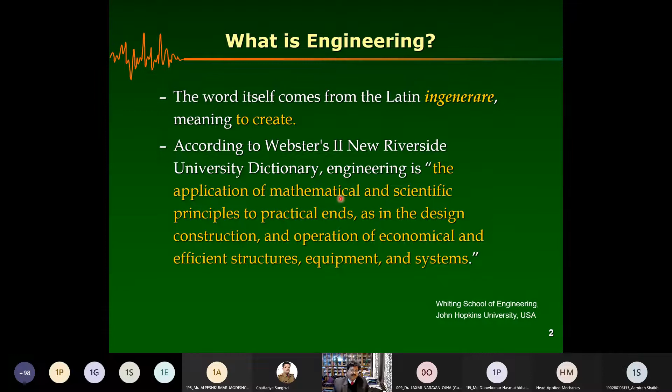But if you see what engineers do, it's a little different than the literal meaning of engineering. It's about art and communication, politics and finance, modeling and simulation, invention, approximation and measurement, and estimation, and more. So from today's discussion, the tasks that are important for us are modeling and simulation, and approximations, because very rarely do we know the entire physics of the natural phenomena or the behavior of structures subjected to these environmental loads. And then the measurement. These are the three tasks that we often deal with in developing new theory or testing new design.

So engineering, as I said, is a way to think about problems and seek solutions. You need to define the problem and then try to seek the solution. Now, coming back to earthquake engineering, if you see what causes earthquakes, that is quite complex. Today we understand that most earthquakes are due to the rupture of tectonic plates.

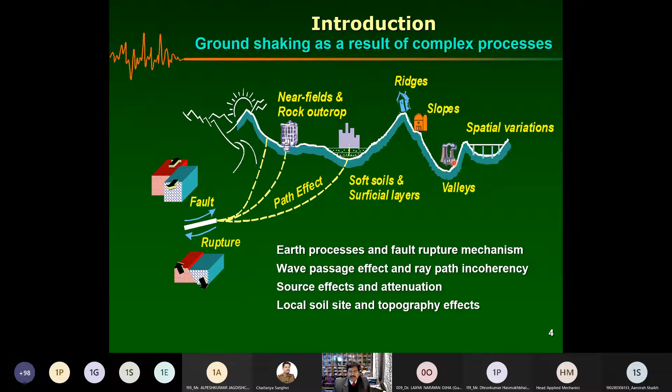And what we know about hazard is that if you're located in certain regions, the code may give you a maximum PGA for which the structure has to be designed, associated with the response spectrum. So these are the two quantities that you need to fix your forces.

So currently we have been having this so-called deterministic or judgmental based zoning map. Now we are also working on getting some probability based hazard maps, and something like a return period of 2,500 years, so you can get, and people have worked also in the past to get a more accurate PGA using different methodology, different inputs. So with time, of course, if we know more and more, these maps actually get updated.

And in some places where you have more data, like in California, you can be more precise, telling what is the probability of an event occurring in the next 20, 30 years, which has a certain probability of exceedance. So the point is again that there are a lot of uncertainties. Even if I choose a PGA, no matter where, there is a certain amount of uncertainty associated with it.

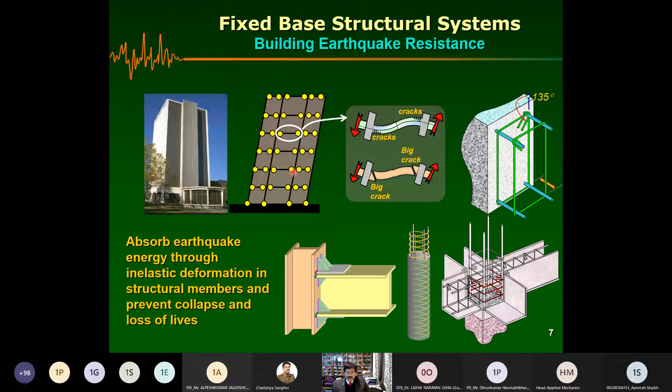So the maximum drift that we put is something about 2%, so that the structure should remain stable, not deflected so much that under the P-delta effect it becomes unstable and collapses. So we need several criteria in the design, and then we wait for the earthquake to prove whether it's right, or we have to do certain experiments.

So the other option is, if you don't like that drift, or we believe primary members should not get damaged, we want our structure still functioning. Then we can have alternative methods, such as various levels of dampers—friction yielding or yielding dampers, viscous dampers—to dissipate that energy and keep the primary structure elastic or near elastic for most earthquakes. For extreme earthquakes, of course, you may have certain damage to plastic, so there's another alternative way of design.

As I said, for further superior performance, you can also have base isolation, which provides a kind of barrier so that the energy does not move to the top. So this is a fixed base, but if I put flexible pads, then I can make this deform and provide a barrier so that the energy does not flow above. So very small movement, better performance—something like what we had in Bhuj Hospital.

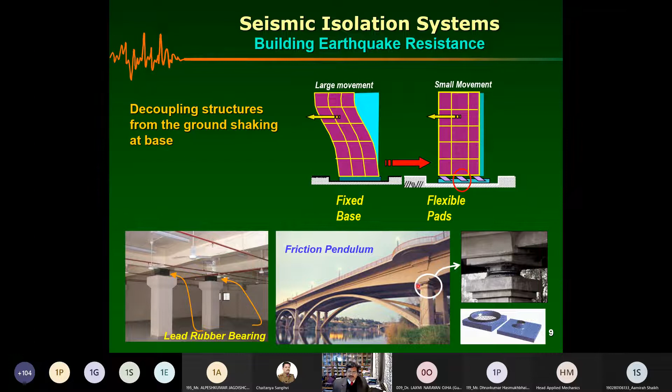Bridges are also being base isolated, on the premise that you are providing a level beyond which this energy from the ground is not transmitted. Then one step further: let's say if I do not know about how the future earthquake would be, can I measure this earthquake and then change the property of my structure in real time so that it can resist the earthquake better?

That brings us to active control strategy. The meaning is that I have sensors that pick up the impending ground motion and calculate what the response would be, and I can have braces which are active, meaning I can make them tight or relaxed, so I can change their stiffness. I can have some mass at the top—if the structure wants to move towards the left, I can move this mass towards the right in real time and create an opposite force to control the deflection.

There can be many strategies, and of course associated problems, because how much power would be needed and whether that power would be available during the earthquake. Remember, earthquake civil engineering structures are massive—you need a very large amount of power to make any changes. Unlike other structures where active control is used widely, such as airplanes and vehicles, which have much smaller mass, much smaller forces are needed to control them.

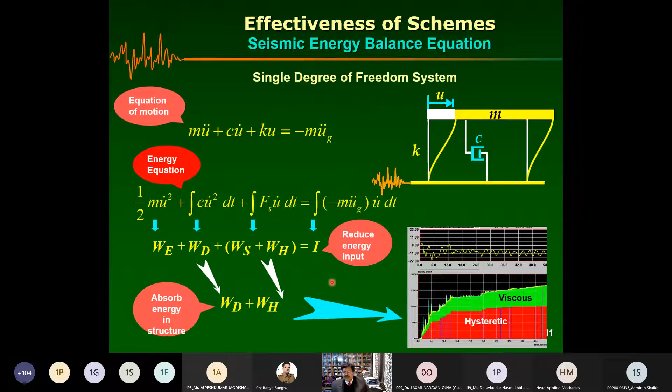And then you see where very little one is your strain energy. So we need to build this energy dissipation potential. Now, how do we test it? Let's say I have built this energy dissipation and then I need to verify it before I

apply into the real life structures. So one way is that we can build the structure, put it on a shake table and apply the ground motion and see its response. But as you can see, the civil engineering structures are massive. Even moving them, building them in laboratory and moving them requires tremendous amount of power.

So what could be an equivalent? If you see this equation here, this is similar to as if the ground motion is applied at the mass. So we can hold this structure at the ground, and instead of applying the force at the base, we can apply equivalent force at the mass. And we will still have the same equations. So if this UG double dot varies in real time, we are simulating the same effect as this one. So this is a moving base, and this is an equivalent force applied at the mass m.

Okay, so that's your approach, and that leads to several sets of tests that we perform to understand the dynamics as well as the seismic response of structure. So as I said, you can perform tests in field, you can perform the experiments in laboratory.

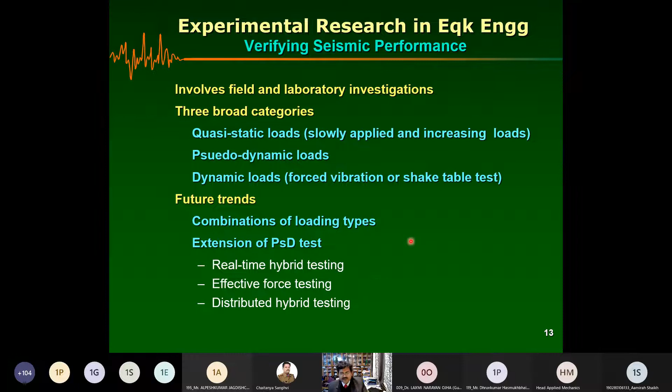Sometimes we combine pseudodynamic with the shake loads in various ways. And because of the equipment, actuators and other things that are getting available, we can have various kinds like real-time hybrid testing, effective force testing, distributed hybrid testing. I mean, these are some variations of pseudodynamic tests, and we will briefly talk about those towards the end.

So one important property is knowing the dynamic characteristic of the system, which is basically your natural frequency of the system or natural period of the system and the damping levels.

You can have a simple electromagnetic shaker and then various kinds of accelerometers that you can use to apply a harmonic load. So that's a very simple way.

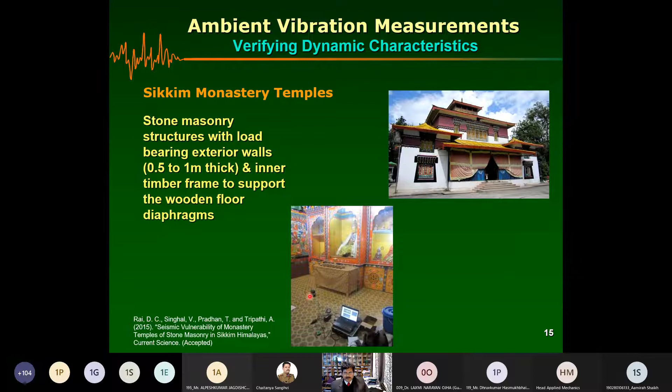Okay, so here you can take the sensors, and you can do measurements with the ambient vibrations, and you can see very clearly that they are short period, or the frequency is somewhere in that range, 3.3 hertz, 4 hertz, the short period. And clearly their acceleration control means their stiffness could be small, but they're so massive that it makes them short period, and they would respond to the acceleration rather than the displacements.

Take for example a half semi-dome gate made of Lakhori bricks and masonry - structures that are 100 to 200 years old, and you do not know what is there inside. You can make certain measurements about their properties and create a computer model, but the question is: does it represent the existing structure?

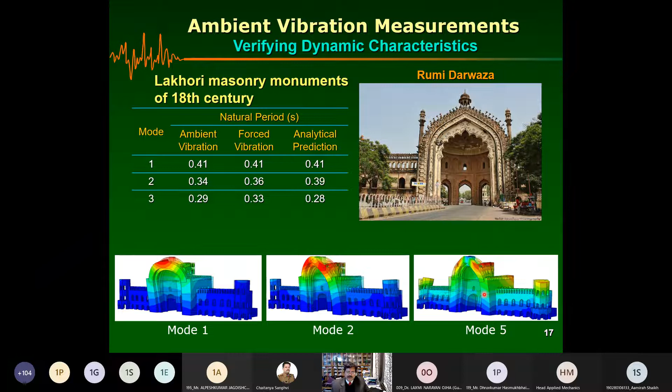You can carry out ambient vibrations, force vibration using mass shakers, and analytical predictions. If you have certain properties and geometry, you can train your model. This model can then be used for further analysis at various levels of earthquakes, and hopefully your results will be more in tune with what happens in reality.

You can go more sophisticated with more details. This is the fundamental mode shape - the structure, being a semi-dome, is unstable in these directions. This structure is about 27 meters tall. This is more likely the failure envelope, or the displacement, or the modes in which it is likely to fail.

The same approach can be used to train models for other structures. Here is a 3-story masonry infilled reinforced concrete frame building. We have an eccentric mass shaker, a larger electrodynamic mass shaker, ambient vibration, and analytical predictions - all in a pretty close range.

This shows that the presence of infills makes this structure, despite having a concrete frame, a very short period structure. The masonry infills actually make it an acceleration-controlled structure.

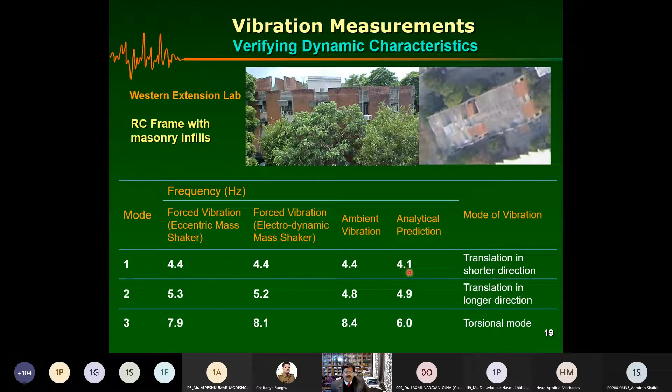Ambient means you start shaking from here, and this portion does not get excited - there's a large opening in between. So even the experiments have to be very carefully planned for structures with such a high level of irregularity. It's very difficult to predict the response of such structures, which is why in earthquake engineering we always emphasize keeping these structures simple.

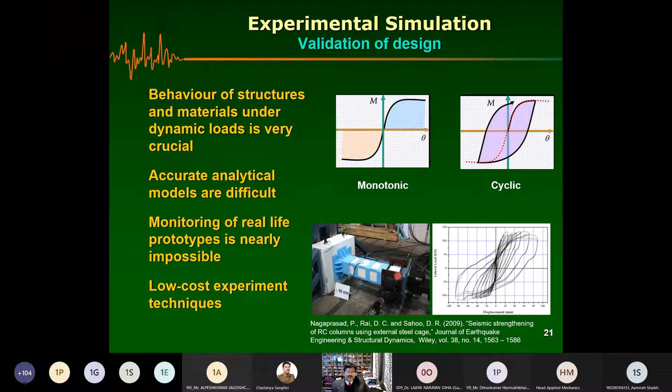So you can see an actuator here, which is applying compressive load, and this actuator here is applying the lateral load. And you're testing half column, assuming that there is a point of inflection at the mid height of the column, remember from the Portal method. So we just isolated an assemblage of the foundation and half of the column. And then we see that yes, it's indeed, you can take the load, hold the load for long, and it works, and it can convert a weak column into a strong and more energy dissipating column.

So let's say you have an idea that we have a steel frame, and this is with simple connections. So we need to provide braces for the lateral loads typically. Instead of braces buckling, whose energy dissipation is very poor, can I put some kind of a damper here? During the earthquake, this damper will actually yield in shear and dissipate the energy.

So what the damper could be is simply an I-beam. We can take aluminum, since aluminum has a low yield value, so I can use a thicker web because this web is under shear and all energy will be dissipated by the web. I can use a thicker web because then I can delay the buckling which occurs. So if this buckling is occurring beyond my design drift, then I'm okay, something like 20-30% shear strain. If I can delay the buckling by using the low yield of aluminum, then I have a good design.

So I need to test it. I go and say, well, everything remains elastic in this case, only this thing yields. So I just take out this part and subject it to sinusoidal load and observe its deflections, shear stress, shear strain, and I can see that it's fairly stable up to 20%.

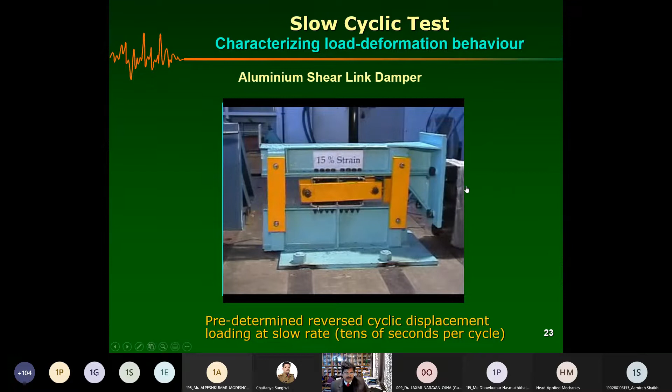So that may be my first step, and this is how I can perform the experiment. You can see that this is a simple experiment in which I'm applying a displacement, a predetermined cyclic load, and then put the sensors here to measure the shear strain and also the deflections from the actuator and the load. So I can get a hysteretic behavior of this.

Now, once you've done it, you can say, well, how this will work for a system. So you can have a column, beam, and this is my retrofitting scheme, that I have a deficient column. I can retrofit with steel jacketing, and then here I can put a damper for additional damping. And then I will put a steel beam which I connect. So this way it's totally a different system, not disturbing the existing beam or existing column. I need a proper frame where I can put everything, so I can apply just the lateral load from here.

So this is the kind of static cyclic test, this experiment. So we can go on increasing the drift and observing the performance. There are some vertical load simulations.

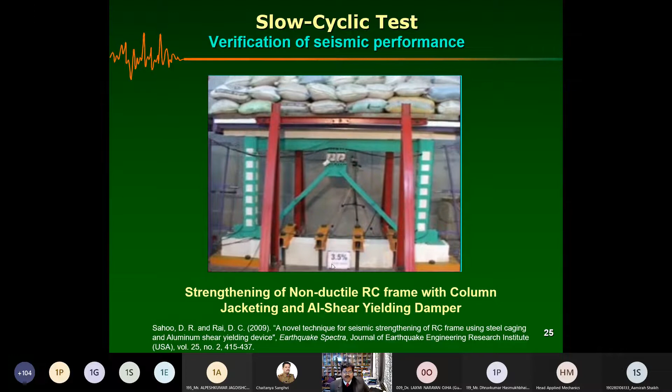So the idea is that all the deformation should take place only in this area, and all other members should remain elastic, especially the braces should remain elastic. We've gone up to 3.5%, and you can see the system performed quite well. So it builds us confidence in these systems.

And that was a half scale model, so the question would be, well, if it works on a half scale, can it work on a full scale? Here it is, 5 meters wide and 3 meters tall, full scale columns, you see. And then you have these dampers here, aluminum dampers, they're connected. And this is at the end of a test.

And then there are a lot of loading protocols mentioned, that if you're proposing a system, it must meet a performance under a specified standardized loading scheme, such as here. And this is the behavior that you can see, that you've gone up to about 20% shear strain for very healthy loops. Beyond that, of course, there was buckling of the web, and then the energy dissipation deteriorates. So 20% is kind of a limit for this.

And this is again a video, and it shows you one loading scheme. So we are looking at this from the front, and we're looking from the back side of this device. And here is the 1000 kilonewton actuator, which is pushing it left and right.

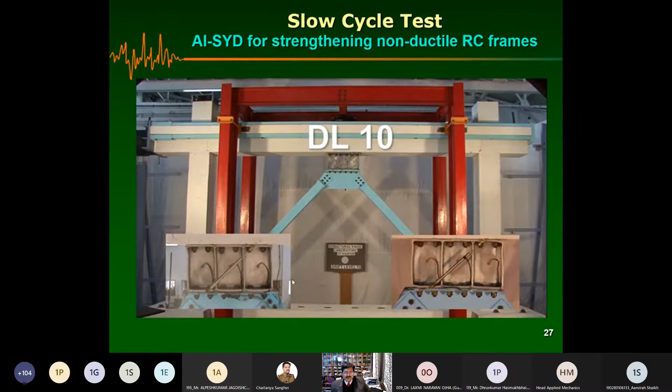And as you can see, the buckling did not take place at that stage. So similarly, we can carry out...

Let's say you develop a new device. In this case, we are developing a buckling restrained brace, and our design calls for an aluminum core. The advantage is that it will yield at low stress, so I can use a thicker plate and therefore delay the buckling and get a better behavior. So this is the design that we propose.

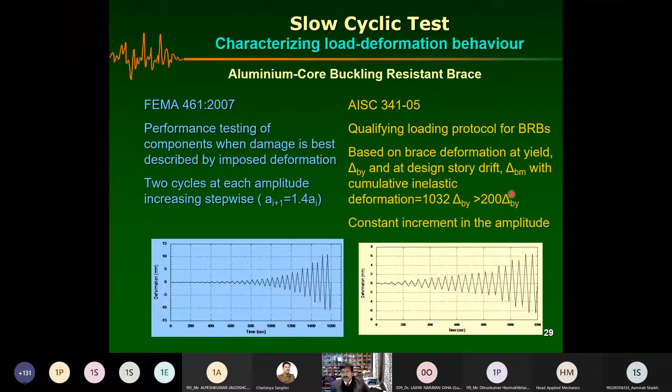Then, of course, there are various loading protocols that a device has to satisfy. This kind of loading has each successive cycle at 1.4 times the previous one, with 2 cycles of loading at each displacement level. But then the American Institute of Steel Construction has a different loading protocol—you can see they also dwell twice, but at different increments, because a different set of people have been involved in developing it.

So let's say this is the device that we developed and built. This is our casing, this is the aluminum core, and we are just applying the axial loads and seeing whether it meets the criteria set by these codes. So you can see that the aluminum thing is extending and yielding.

Now, what is the difference between these loading protocols? You can see that more or less they're talking about the same thing, and the behavior was quite good. We can go up to 6% axial strain without any buckling, and you can see some strain hardening because of post-buckling response. So the scheme actually does work.

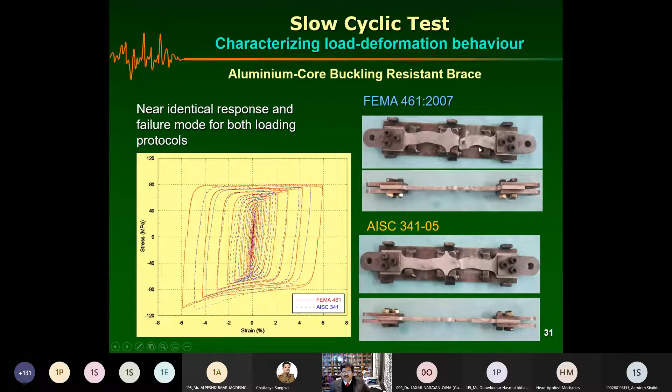Once we had done this, we thought, can we use steel in place of aluminum? So you can see this—it buckles, and then the steel is so strong that the casing which is there to prevent it buckling, that also buckles. So now you need a very heavy casing if you're using this steel core, whereas the aluminum is very nice.

You can see very stable behavior even up to very large deformations. With steel, though you get more strength, you do not get enough strain. So that shows you the comparison between two different materials, and some of these can be established only by experiments.

Now, let's say where do you want to use it? Let's say we want to use it in a truss moment frame, where there's a truss and a column, and here I'm using it as a knee brace, this link. We can test only this portion, because there is going to be a point of inflection here and a point of inflection here. So I can just take this portion and test it in the lab.

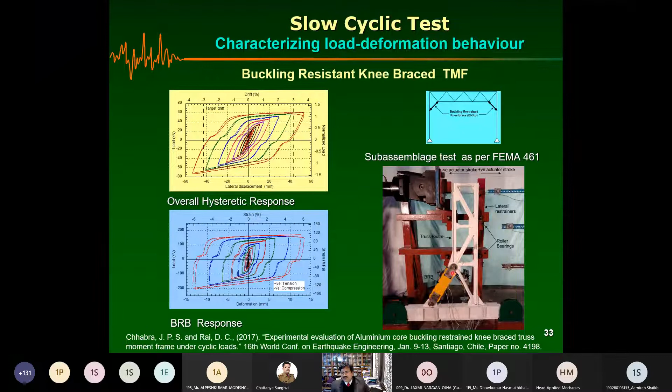So we create a sub-assemblage, create the proper displacement and force boundary conditions, and then we have to demonstrate that the entire truss and the columns remain elastic for the design forces or design drift, and only the braces buckle or yield. Once you've done that, of course, you need to perform experiments. This is another set of experiments.

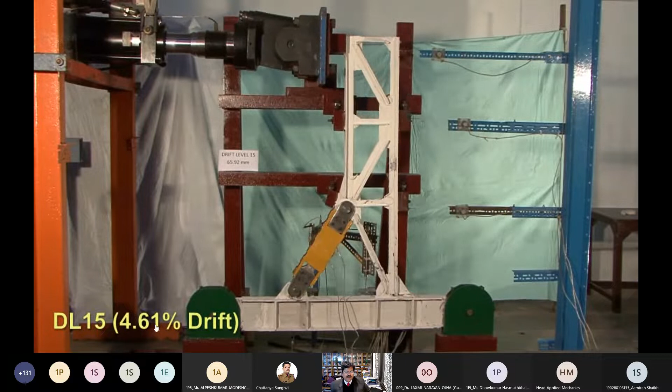At 2% drift, the system is more or less elastic. So these are the ways in which a new system that you develop can be verified, and experiment is the only way.

These days people are using AAC blocks as infill material. Now the question is, are AAC infills better than clay brick? What would be its impact if you have open ground story frame buildings—are AAC blocks better compared to clay brick? So you want to carry out this analytical or fragility analysis of these systems, but then you must know how the frame behaves with the AAC infills.

So again, if we can perform an experiment and find out what its hysteretic response would be, I can actually develop the fragility curves, and similarly I can develop them for the clay brick, and tell you at different loading levels what the differences would be, and which one is better.

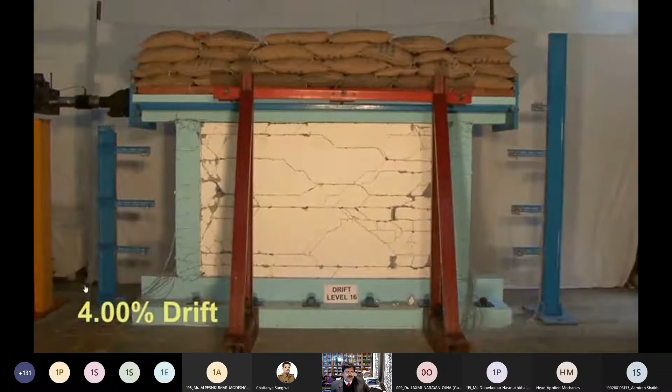So to generate this, you need to have a frame, place the walls, and then apply the sinusoidal lateral load to generate the force deformation relations. We need to go at least 2% drift because that's the minimum required, and since we're doing a sub-assemblage, you should do a little bit more than 2%. Now you could have seen how the behavior was, much better.

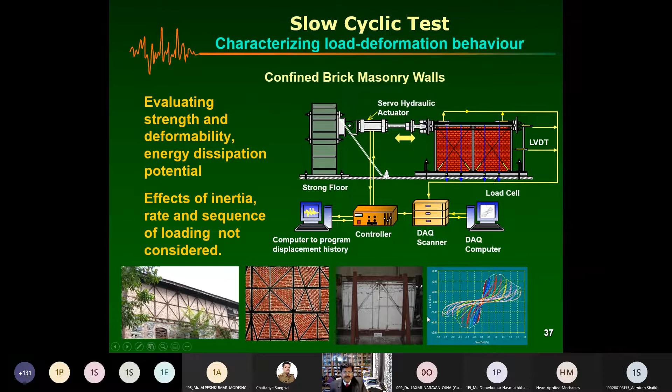Than the clay bricks, but visually it's okay. Similarly, for any systems, let's say you have the confined brick masonry system as people have been building in many earthquake prone regions such as Kashmir, etc., and you want to study the force deformation relations. That's why they do better. What is their nonlinear response?

Go to the elastic. We can build the specimen in the lab, subject it to gravity loads, and obtain the hysteretic response. As you can see here, this can go up to 1.5% drift and even maintain significant strength up to 2.5%. What this is doing is because of the timber in there, it subdivides this wall panel into smaller segments, and there is a preferred sliding plane along which this masonry moves and dissipates energy and imparts flexibility.

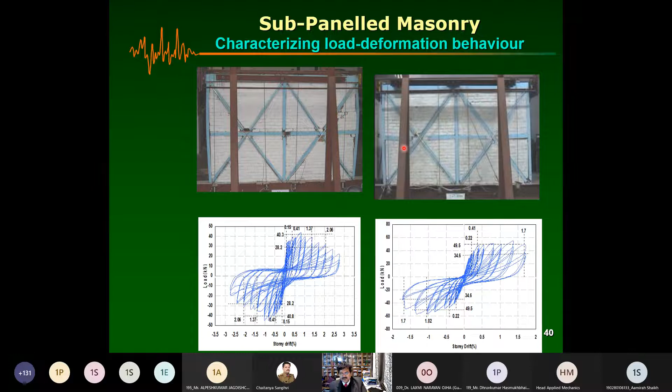So from choosing the arrangement, you can see what is good for you. Now we have performed the experiments, you can model in ABAQUS to get better insight. Once you have that, you can develop some design equations. Like here, what we've done is the confinement parameters, how many more interior members you have compared to what we need just to confine from outside.

And if you have just horizontal and vertical, the strength increases much less. But if you put the diagonals, the strength goes up. So you have some data from the experiment, and others you can do with finite elements. Similarly, you can do with the stiffness - the horizontals don't add much stiffness, but verticals add more stiffness. So these give you some idea about how, if you want to design this confinement, how many extra elements are needed.

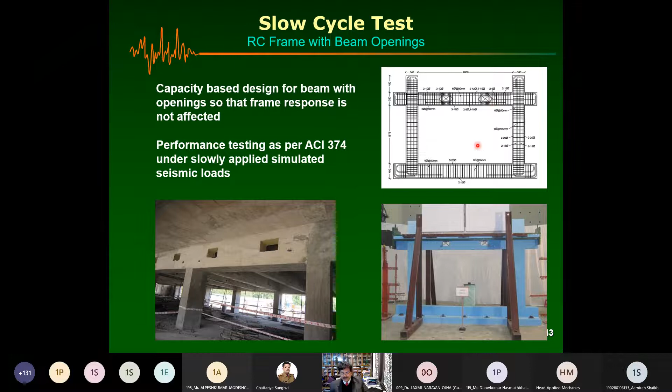So this is the half-scale specimen constructed in the lab. Again, we have to test it according to the ACI 374 loading protocol, going all the way up to 2% drift to see whether the system is doing well.

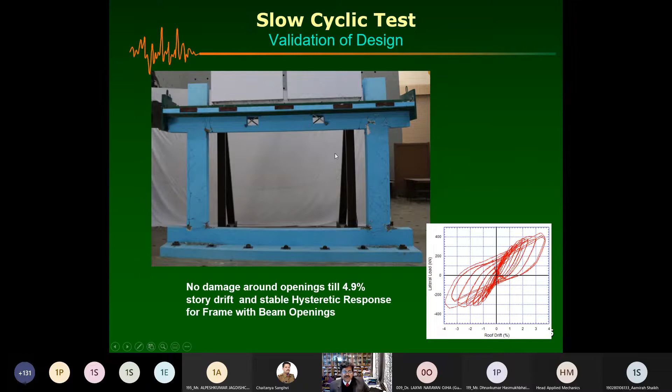This is at the end of the test. You can see that this opening design was perfect, and you have the plastic hinging at the end of the beam. Since this is only one column, there are some damages here, but this is very large - 4.9% drift - and you can see fairly stable behavior. So if you have very small openings, located significantly away from the column ends, with sufficient reinforcement at the chords, at the bottom and top chords of the opening, then you can have these openings even in frames resisting earthquake.

So that's pretty much the static test that I talked about in several applications. Now, the equation of motion was like this, so we are only concerned about getting this load displacement response. Now, how about the two other components, the inertia and damping, and then the real earthquake?

So what I can do is create a mathematical model in the computer and solve this equation, and find out what the displacement should be, and that I feed to my actuator and then displace this structure, measure the forces, and then modify this K again, and solve for the next step. So in this case, I would be calculating the inertia forces and damping forces in the computer. Their effect is calculated analytically, and the new displacement is calculated and applied to the structure, then next step. So step by step we are simulating. We're not doing real time. As the earthquake, let's say, is 20 seconds, we may take 2 hours to do this test, but in a way we will be compensating for the effect of damping and inertia, and that is called pseudo-dynamic testing.

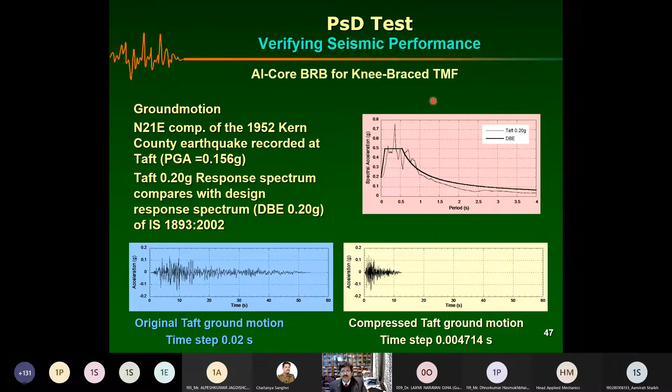So here is, let's say, this same knee brace TMF I had, and I want to verify it for the Taft ground motion. Since we are doing scaled testing, we need to reduce it, so we need to make certain modifications to the ground motion also. We compress it because of the similitude requirement. And we choose this Taft ground motion because it fits very well our design response spectrum for which the system has been designed. And this is the specimen that we built. Let's see if this works.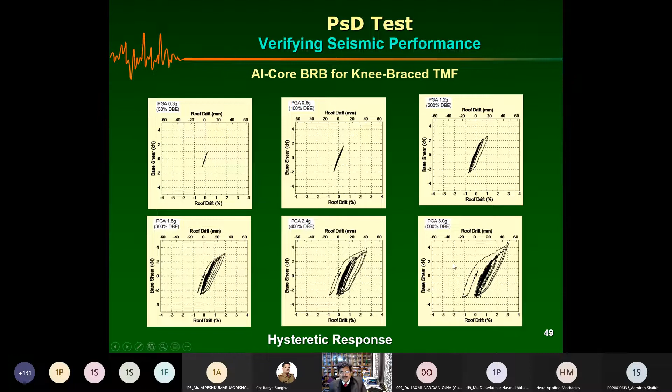You can see that now we're not applying the cyclic load, but rather we are applying that earthquake. And these are the 4 knee braces that you can see moving here. We are applying 3G Taft ground motion, so this is 5 times the design basis earthquake. We can run each. You can see this is half of the DBE, 100% DBE. The system is elastic, almost at MCE level. There is a little bit of yielding, and as it goes further and further, you can see. If you notice, the structure actually starts from there, gets displaced, and never comes back.

So this way we can have confidence in how much reserve strength there is and how good this system is. This is another way of measuring: what was the actuator load that we measured versus what I calculated from my computer, and it follows very closely, meaning we are simulating this earthquake effect, the inertia effect, very, very closely.

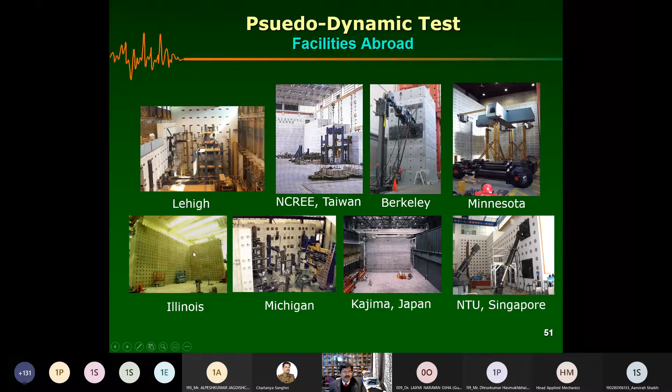Now, as you can see in this test, if the specimen gets bigger, you need a very large reaction wall to support the load and push this structure. All the major labs in the world have such 2-3 story massive walls to push the structure to the ultimate. So at IIT Kanpur, we also built a wall.

The wall is 10.5 meters high and almost 2 meters thick, so we can test pretty much 2-3 story buildings and bridges of 15-20 meter length. We can apply 1.5 meganewton load in shear and 2 meganewton axial at each of these anchor points, which are located at 2 feet.

The load rating of the system is typically how much moment it can resist without any appreciable displacement, and in our case that is about 10 meganewton moment for each 0.6 meters. So these are some pictures showing the construction of it.

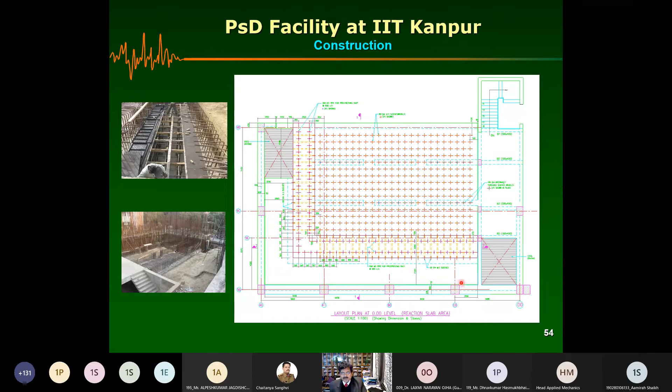This is, as I said, the pseudodynamic testing, a cheaper version of the shake table tests. If done right, you can get the same set of information. These walls are pre-tensioned, post-tensioned with the same cables as we do in bridges. You can see all the post-tensioning so that we can get more moment capacity for these walls as a cantilever.

You can see the layout, and this is the reinforcement for the columns, the normal reinforcement. And this is how the structure was finished. The first test that we did was the one I just presented about, the frame with the beam openings.

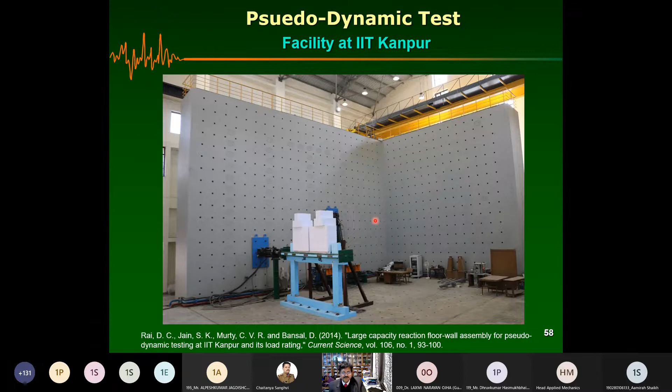Now, this is not only limited to the size, so that's what we refer as hybrid testing. You can test a portion of the structure in real life in your lab, and the rest can be analytical. The way we can do it is with our equation of motion, we can actually divide or partition it, something which is experiment, something which is analytical. So there are various possibilities.

Now, if these actuators are coming, which can move in real time, then we can run the whole earthquake in just 20 seconds, as we do in real life. But for that you need very fast computers and very quick response actuators. So something which is limited we can do at smaller force levels, but not at large force levels. In future, you may get actuators which can move in real time, and we can do real time dynamic tests.

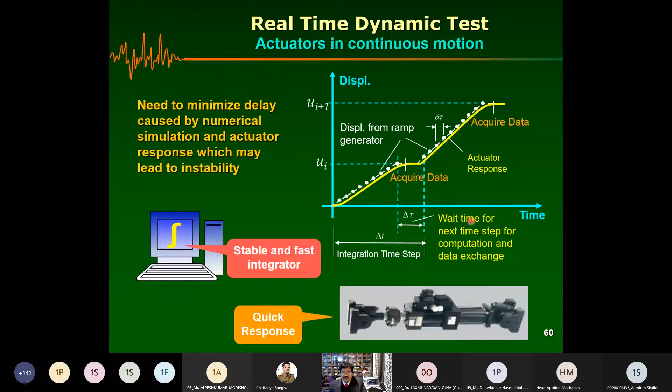But the largest shake table that we have is set up in Japan, which can take 1,200 tons. You can see it can go maximum acceleration 1g. This velocity is very important, 2 meters per second, because if you see the 94 or 95 Kobe earthquake, there's a lot of damage because the velocity of that earthquake motion is much larger, somewhere between 1.5 meter and above.

So they wanted to build a shake table which can have maximum velocity 2 meters per second and displacement 1 meter, using 24 actuators of 450 tons. The total power requirement to run this could be more than what's required to power many cities.

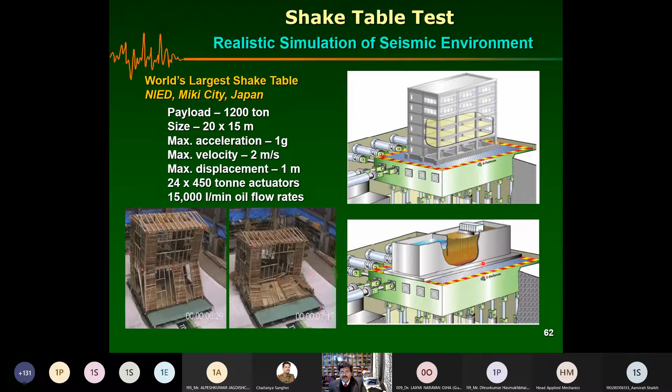The first thing that they tested is the timber frame, because those were badly damaged. Analytical simulation modeling this timber and its joints is very difficult, but experimental verification and data not only helps you see how the structure failed, but also trains your computer models. Of course, you can have soil structure interactions, soil water interactions, and many other things on such a large table, but they're very expensive.

So now we've been talking about this, our aluminum shear link. You can say, well, can we test it on a shake table and see if that works? Here we are using a 1/12 scale model. So you have very small shear links connected, and this is the artificial mass simulation, the mass which is attributed to this particular frame, and here is the response.

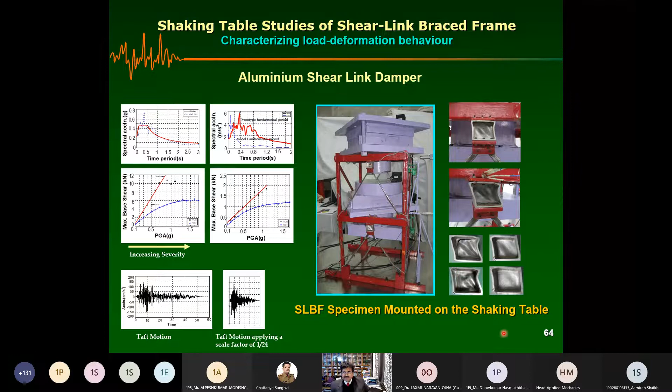If we are elastic, if there were no dampers, the response is something like this. This is the maximum base shear, which increases as you increase the PGA of the ground motion, same Taft motion. But if I put the dampers, it's the blue line, because it starts yielding and does not let the forces increase beyond that, it buckles and yields. So this is something you can do for proof of concept tests. You can design it appropriately following all the similitude laws, so that only the forces and the resistance will be proportional, and you can observe the behavior more accurately.

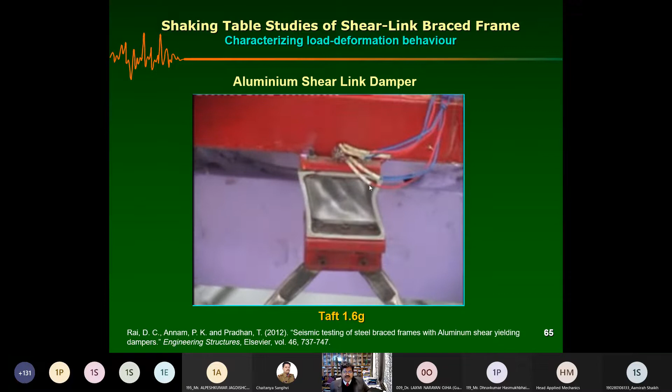So this is the Taft motion, we had 1.6G, and then we ran white noise to find out the dynamic characteristics of the system. And this is something at the very end, and now you can see this, we're able to simulate the buckling of the web, and you can see this, the braces remain elastic, so of course it does not.

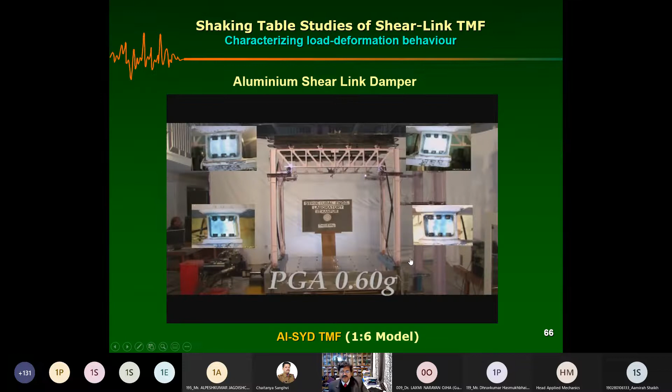By looking at this, this is not your typical building bracing system, but a proof of concept test. We have another setup for the truss moment frame, and you can see that the normal TMF without the damper will have this response. With the aluminum shear yielding, you can see it starts yielding, and no matter what the acceleration levels or base shears are, they get capped because you are dissipating that energy.

Here are the comparisons between their time history responses. You can see with this damper, your acceleration levels are way lower than what they were if there was no damper.

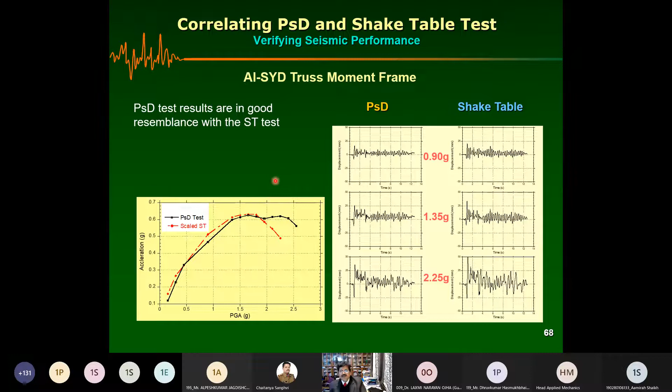There are two sets of tests we did: one is a shake table test and one is a pseudodynamic test. Here is the comparison of these two tests, and you can see that they follow very closely, these are the time histories. So in one way, what I'm trying to show here is that pseudodynamic test and shake table test are equivalent, if you do it right, they give you the same result. And the pseudodynamic test is much cheaper than the shake table test, and you can build a larger specimen and test it.

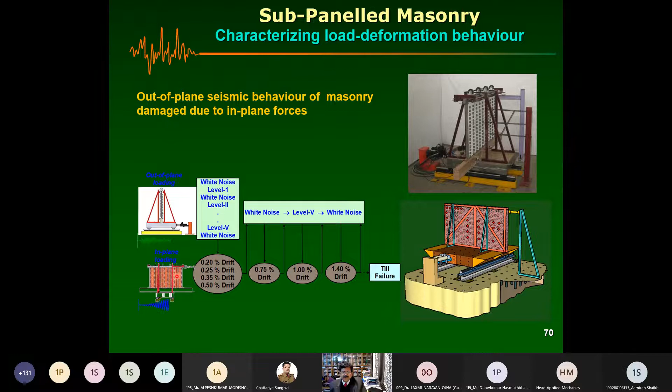The same thing can be done for many other systems, like masonry walls. You can combine the shake table test for out of plane loading with the in-plane test using actuator loading, as we talked about. You employ the shake table for the out of plane, as in this case, and for the in-plane you bring in the frame and immobilize the structure in that direction, then apply the lateral load with a particular loading program to study what happens if the wall gets weakened under in-plane motion, and how that affects its out-of-plane response.

Now you see these little dots - these are actually lead blocks, created because we're using half scale bricks. With half scale bricks, we're reducing the geometry by half, but the volume goes down by 1/8, so inertia forces also get reduced. We have to bring up the inertia forces to compensate for that loss, so I need a non-interactive mass which does not add to the stiffness but adds only to the mass. That's how these lead blocks are done.

Additional mass needs to be added for each brick, equal to the mass of that brick. In this case, we are adding one block that is actually 0.865 kg, which compensates for 2 bricks.

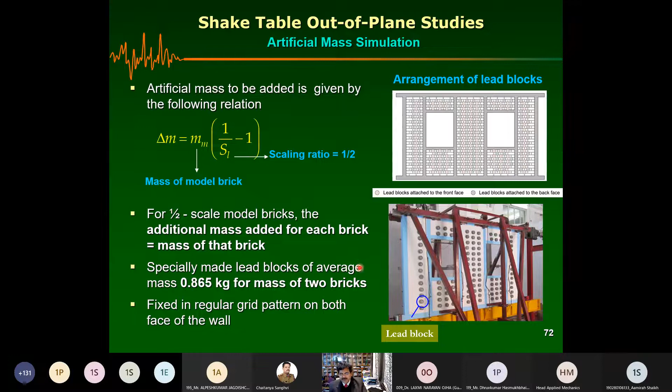So then you calculate it, you attach it, and here are a few videos just to show the difference of what internal elements can do. This is a half scale model, and you can see only boundary elements are there. If somebody is looking at it, they will calculate the H over T ratio - this is half a scale of your 3-meter wall and 5-meter wall. You can see it can go up to only damage state, barely damaged, and collapse.

But let's say if you put some interior members here and subdivide this large panel into 4 small panels, the slenderness ratio gets reduced by half, from this point to this point.

We apply the same loading program - 0.5% drift, typically masonry cracks at 0.5% drift. If you push it further, you get more damage.

Now you can see the damage is more distributed across all 4 panels. We've gone up to 1.4% drift, and still this masonry is inside the frame - of course you can expect some cracking way down there.

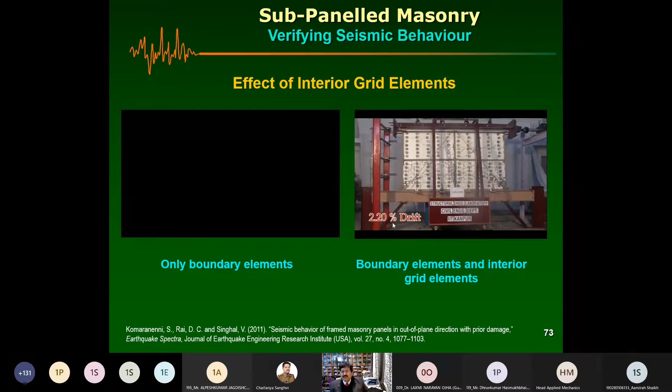This is 2.2% drift, something we expect in all frames, and still the masonry is inside the frame. So we just applied a much harder load, a catastrophic load, just to see whether we can somehow push this masonry out of the frame - something you'd never see in an actual earthquake. This just shows you the effectiveness of the interior members.

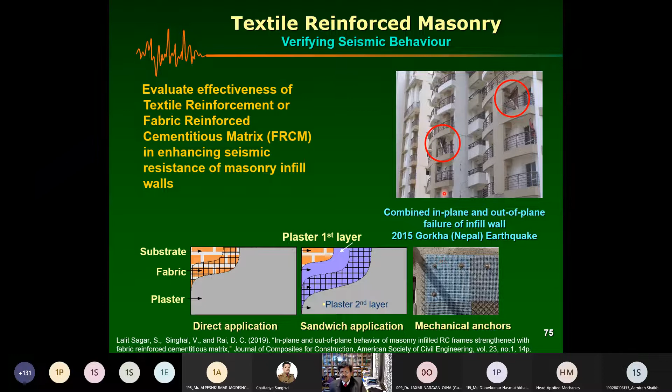There are many other techniques people are coming up with to improve the out-of-plane resistance of the wall. One is this glass fabric textile, which you can apply directly onto the masonry walls and cover it in plaster, or you can have 1 layer of plaster, put it on, and finish with another layer of plaster - that's a sandwich application. Or you can have mechanical anchors attached. We want to see how effective this is, so once again we need to perform some set of experiments, and this is showing you the assembly.

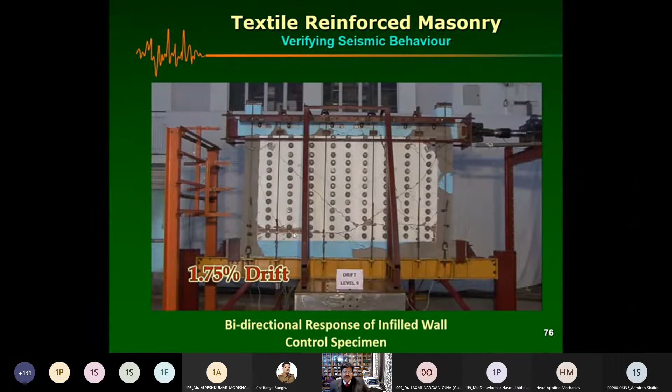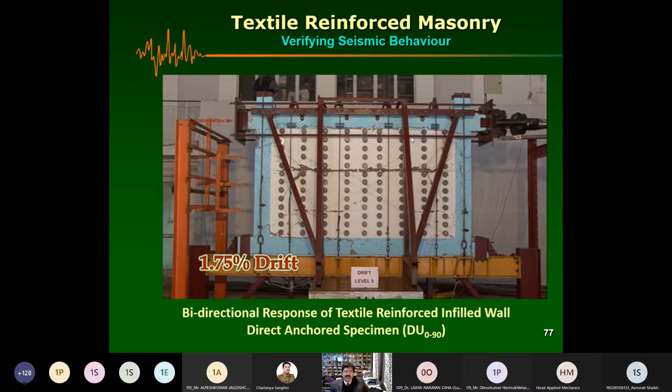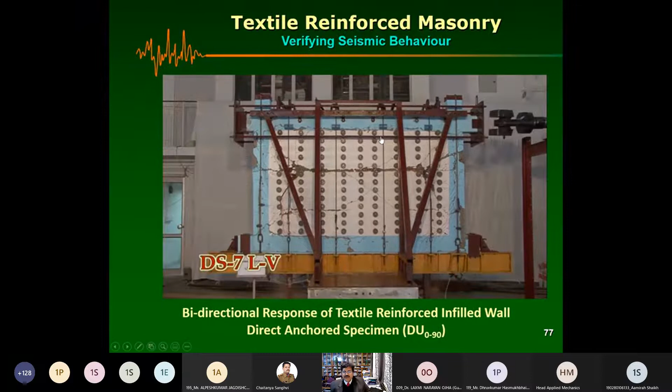So this leads to your confined masonry constructions, which is also very common, where the masonry is raised and then the column is filled up. It's very common in most earthquake prone areas, and you can evaluate whether you want simple infill or what this confined masonry does.

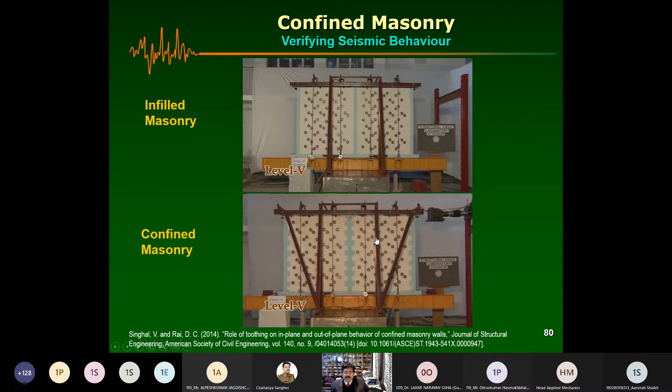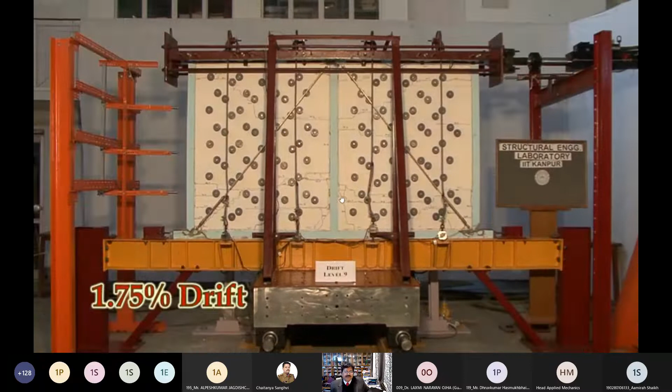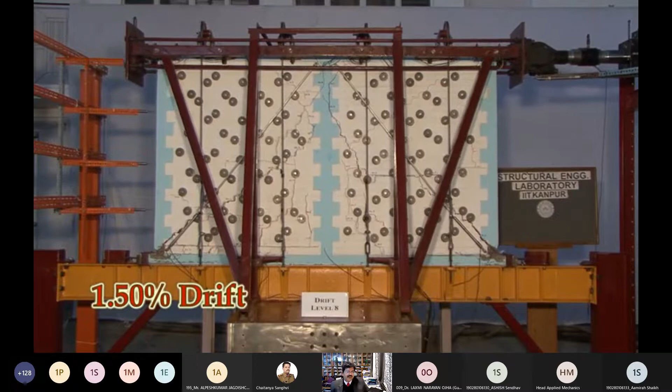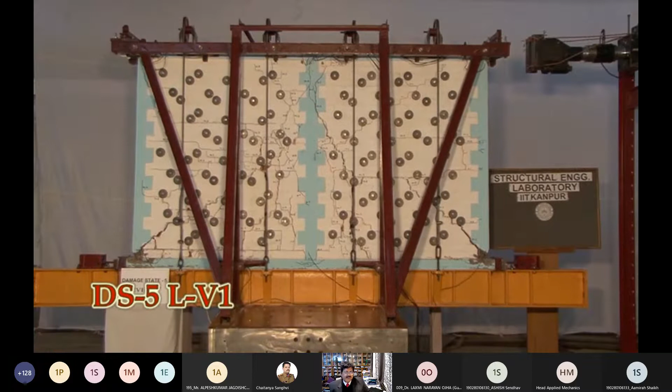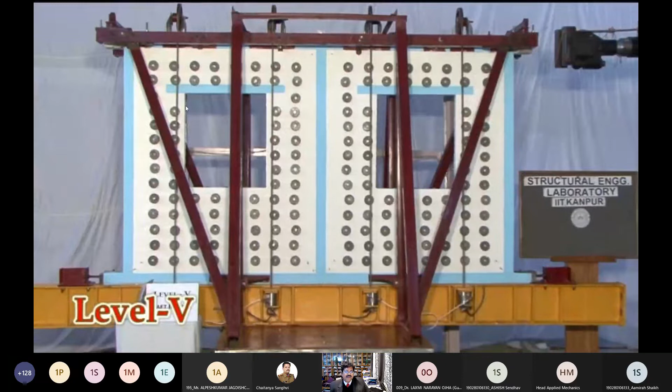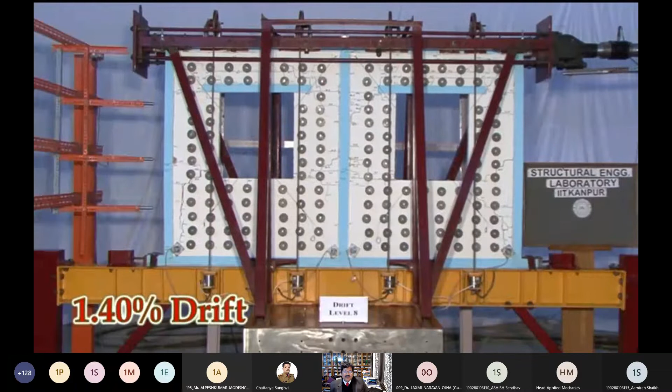So one could expect that the damage would be mostly centered around these openings and the door, maybe the windows, if they get stuck, etc. You may not be able to open it after the earthquake. So there are many...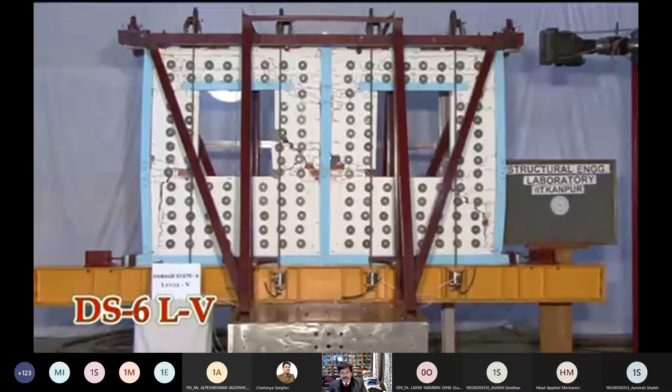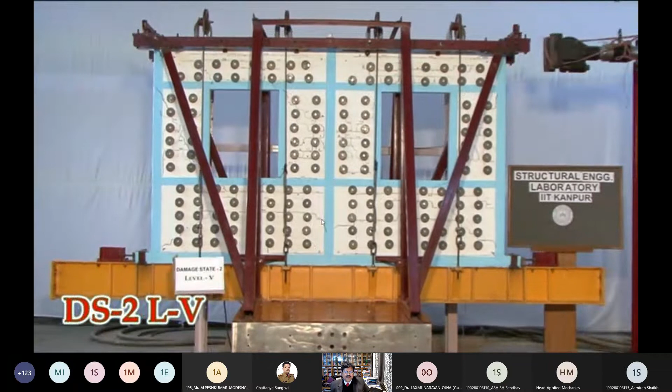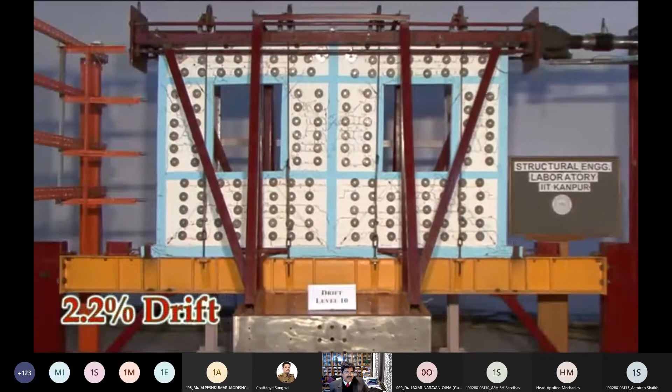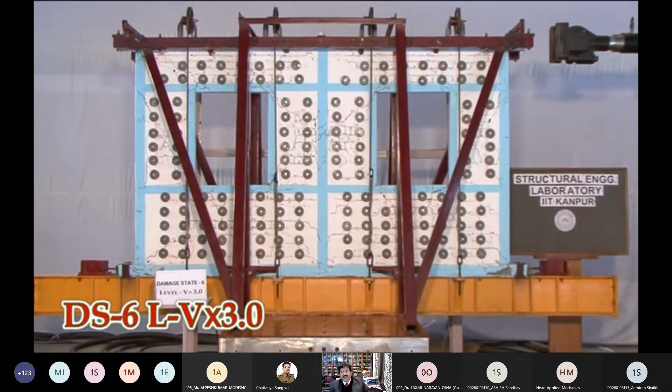So you can read more about some of the papers we published, which show that here you can see this is the solid confined masonry wall, in red, and this is the one with openings. You can see that they reach the same peak and are able to be more ductile, compared to this normal infill masonry, which loses its strength much faster. And no wonder, there are many places where people are now using confined masonry.

This is one of the last examples—you can use these experimental techniques even for non-structural components, like suspended ceilings, which these days are becoming more common. You have plastered board ceilings, which are just one unit or several units added together, hanging in various configurations. You can have just vertical, or vertical and braces, or it can be connected to the wall all around, or fully suspended.

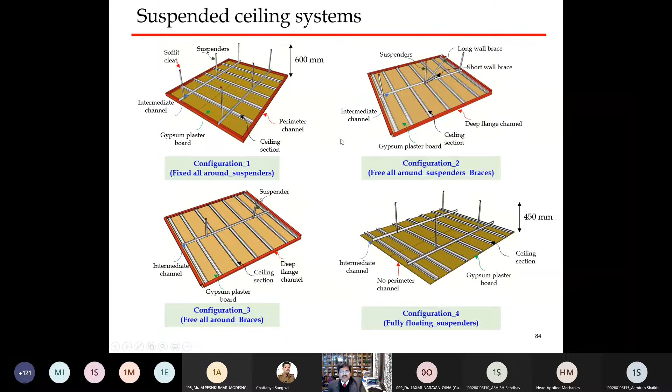So the question is which configuration is better. We tested 4 such configurations, and this is the test frame that we had. This is our shake table on which we put this rigid system, on which we create a 3 meter by 3 meter frame. And this is the ceiling, which can be suspended.

We make it rigid so that we are assuming the walls of that room are rigid, like infill walls, and then they are suspended from the top. The top members are adjusted out of plane so that they have the same natural frequency as typical floors, and then this suspended ceiling hangs from them.

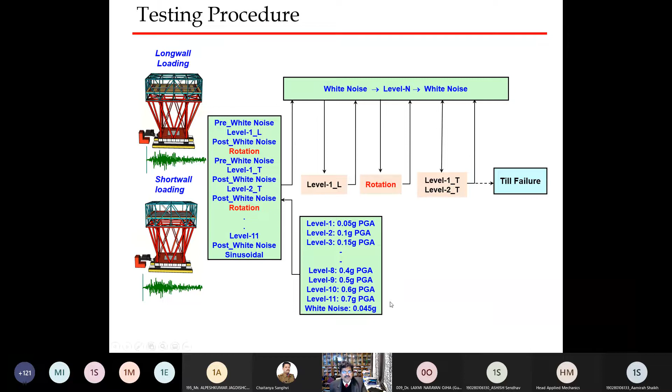And since we have a uniaxial setup, we apply the load once in the long direction, then we rotate and apply it in the short direction, and that way we can perform a set of tests just to see when it starts failing. So this is the setup, and then we put all the sensors, etc., to measure strains in the suspenders and everything.

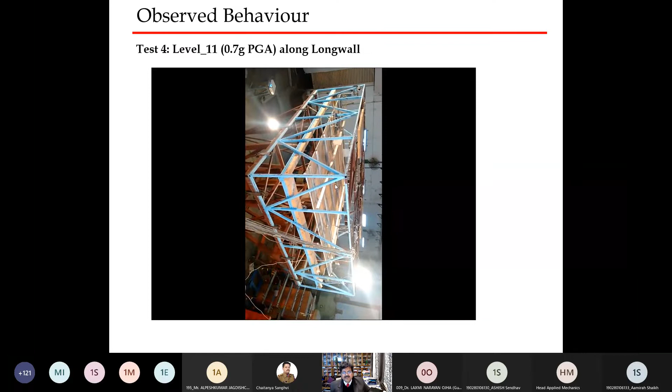And then we keep increasing to the further levels, and then we can have all the recordings. We can see the response when there was no damage or more damage. These are the last ones we're seeing, fully floating. So fully floating, at 0.7g PGA, that's the last one you saw, has much more displacements compared to the ones which have other members, free or fixed all around. That is the best system.

Then free all around, but the braces are as good as fixed all around, and free all around suspenders, but the fully floating are really bad. So once we have this, we can train our computer models, and then do it for many other earthquakes.

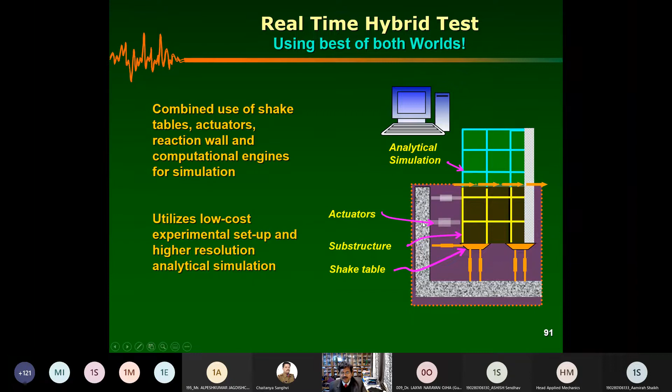As I said, there can be a real-time hybrid. We can have a shake table, then this pseudodynamic part, and the rest goes into computer simulations. So people are trying various ways so that we can understand our structure better.

They are being run through over the internet. What happens is that a 15-second ground motion was completed in 5 hours, because of the communication over the internet. Somebody had analyzed this on the computer, taking the input from one end, solving it, and supplying it to the other end. So you're running these 3 components of the same structure at 3 different places and in 3 different modes, 2 physical and 1 numerical.

Likewise, if you look to the future, conventional wired sensors are being replaced by wireless and non-contact sensors. We have techniques to measure the full field displacement or strain field, and we can synchronize our visual images with the data, because we can stamp it and play it back.

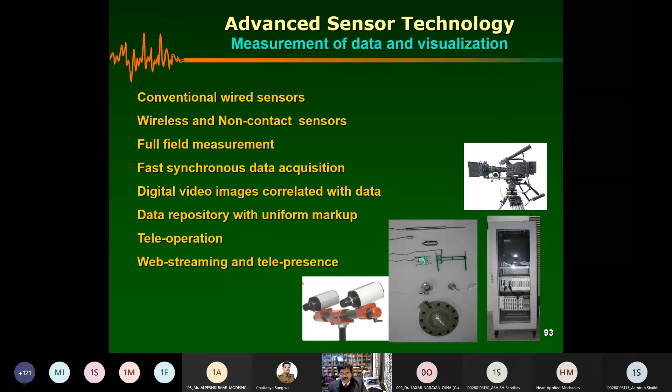What this does is that, while few experiments are done, you can have the information, and people can play it back online and have the same feeling as if watching it in the laboratory. So these are the areas in which people are being active to do more experiments.

Since our focus has been on earthquakes, in the end I would like to say that you need to build earthquake resistant structures, but that doesn't mean we only have the methods people have used in the past. We can have newer methods which give us better performance, but these novel techniques need validation, and that validation can come from physical tests as well as analytical simulations.

Physical tests should be low cost, and analytical simulations have higher resolution because they're cheaper. So we can do high resolution simulation, but some physical tests are needed so that we can train or test our analytical simulations. This is one reliable and effective method to study the behavior of a structure as a whole, or any of its components.

As I said, there are more methods being discussed and coming up, which can help us understand the structure better, and therefore we can build more efficient and safer structures in the future.

The last slide. This is not our experiment, but one done at UC Berkeley on their large shake table, showing the success of design, meaning we have a ductile column for the bridge. This is a circular ductile column, as we know from the late 90s, on both ends, and in the middle we have a non-ductile column, as was done before the 70s.

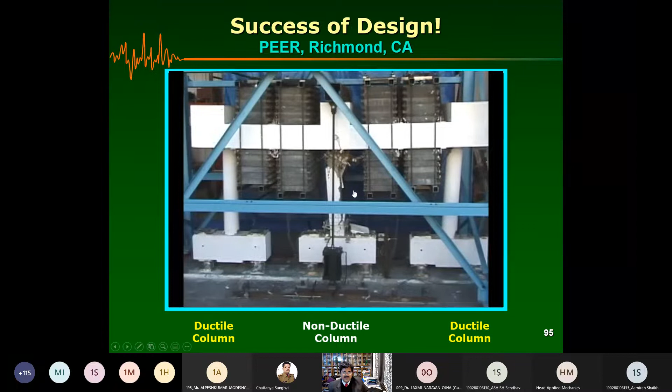So this is the way, and of course you can see that a design can be tested on the experiments. For every occasion you can find a quote, and I found one which relates engineering and laboratory: engineering without labs is a different discipline. If we cut out labs, we might well rename our degrees as applied mathematics. So that is all from my side, thank you very much.

Can we just stop at this slide and see if there are any questions?

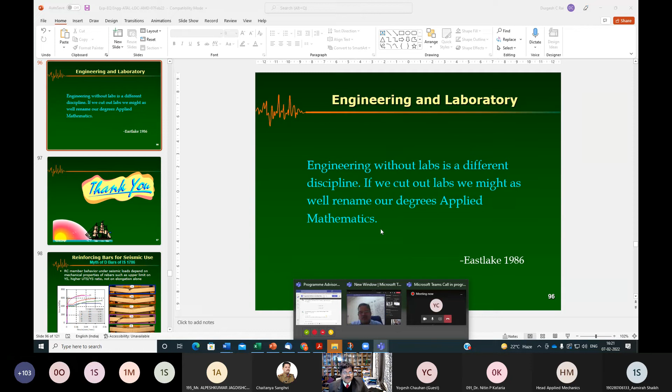Okay, sir, thank you, sir. Okay, thank you, sir, for answering all the questions. Okay, good, thank you very much. Now, I guess no one has a query regarding this session. Thanks again, sir, thank you very much for such a great session.